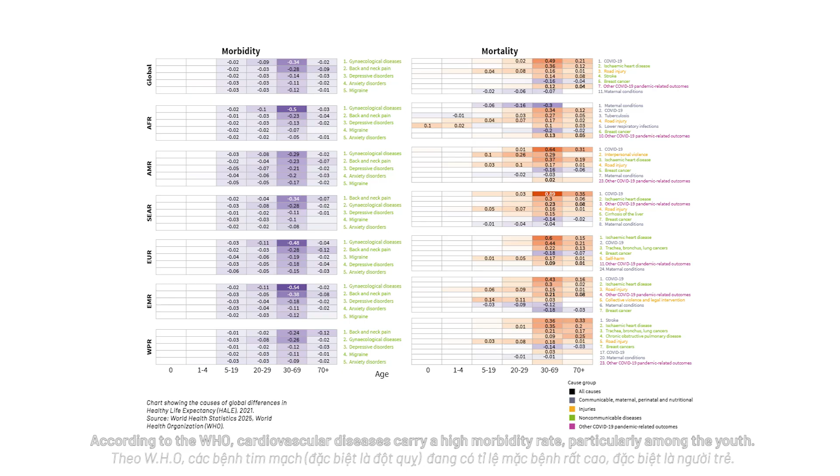According to the WHO, cardiovascular diseases carry a high morbidity rate, particularly among the youth. Vietnam is no exception. Stroke and ischemic heart disease are the leading causes of mortality here, disproportionately affecting young adults. These conditions are entirely treatable with timely intervention.

Yet, in reality, specialized hospitals are heavily concentrated in major cities. This leads to chronic overcrowding at top-tier facilities, while regional patients face critical barriers to rapid diagnosis and emergency care. Therefore, bringing specialized hospital models to local provinces is an urgent necessity.

Take Dong Nai as an example, an industrial hub with millions of young workers. Every morning, we witness crowds traveling to Ho Chi Minh City for medical care, while local provincial hospitals remain overloaded. Moreover, dense truck traffic and rush hour congestion create fatal roadblocks for ambulances.

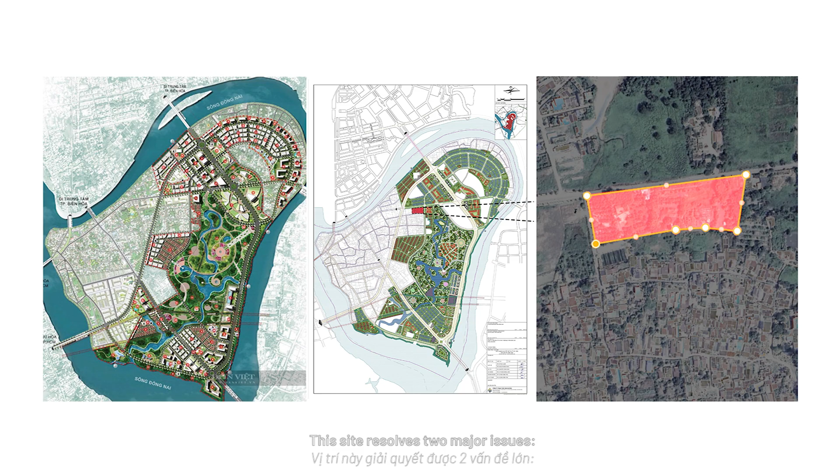To solve this, I designed the 400-bed specialized hospital for cardiology and stroke, located on Hiep Hoa Island. This site resolves two major issues. First, it connects seamlessly to major intersections without industrial traffic or heavy trucks, securing the golden hour for emergency resuscitation.

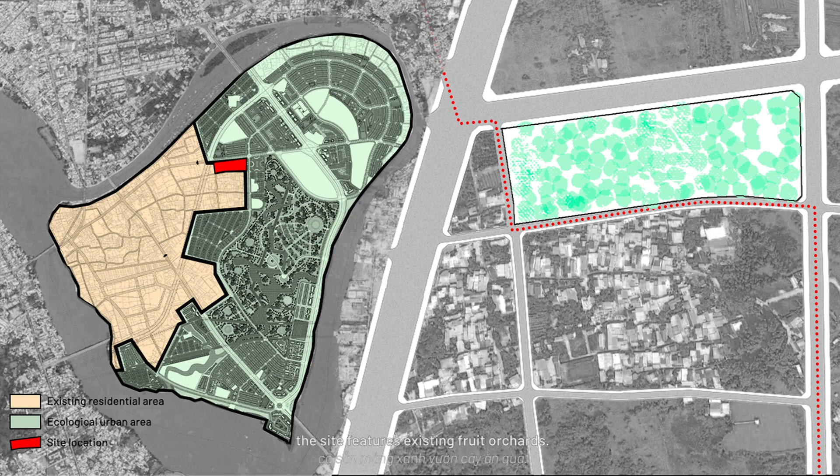Second, nestled between traditional neighborhoods and eco-urban areas, the site features existing fruit orchards. I retained a portion of this greenery as a transition zone, turning familiar community elements into a healing therapy that strips away the cold, clinical atmosphere typical of hospitals.

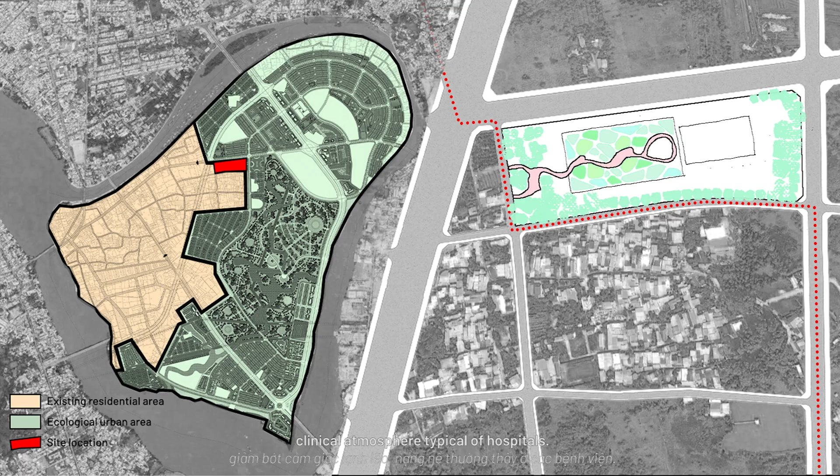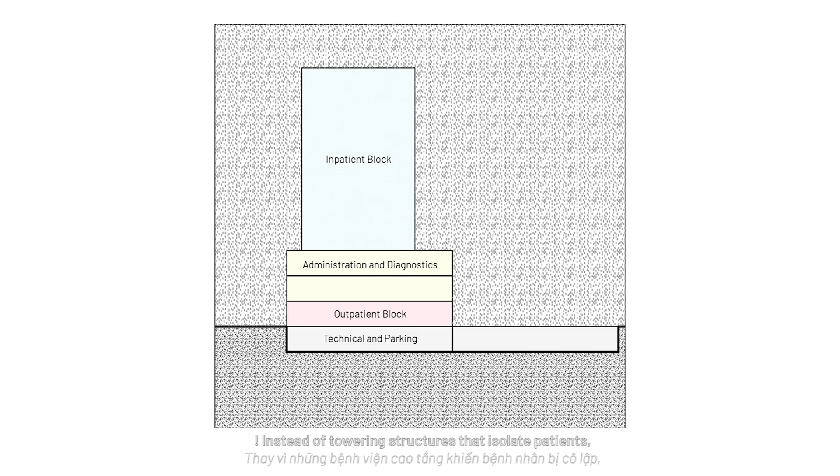Due to zoning regulations, the building has a maximum height of 6 stories. But I view this as an advantage. Instead of towering structures that isolate patients, low-rise architecture aligns the inpatient block with surrounding townhouses, creating familiar, comforting views for the patients.

The outpatient block is gently elevated, giving it a floating sensation like a river island or a ship on water, while liberating the ground floor to form a vibrant public plaza.

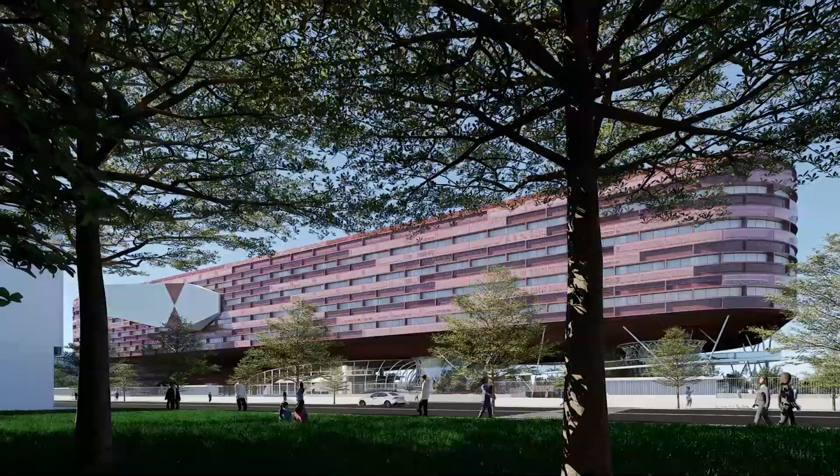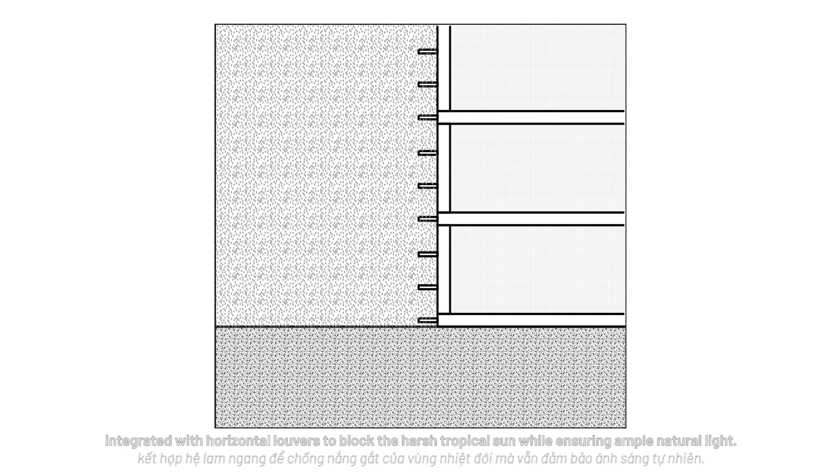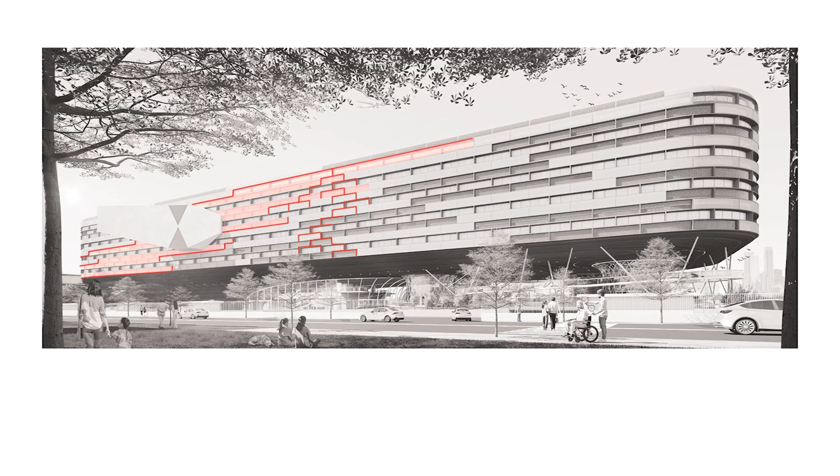On the facade, windows open along the north-south axis, integrated with horizontal louvers to block the harsh tropical sun while ensuring ample natural light. Notably, diagonal lines wrap around the structure, a design language inspired by blood circulation and nerve branching. I selected terracotta and pastel pink tones to soften the architectural mass and evoke a gentle, welcoming feel that feels less institutional.

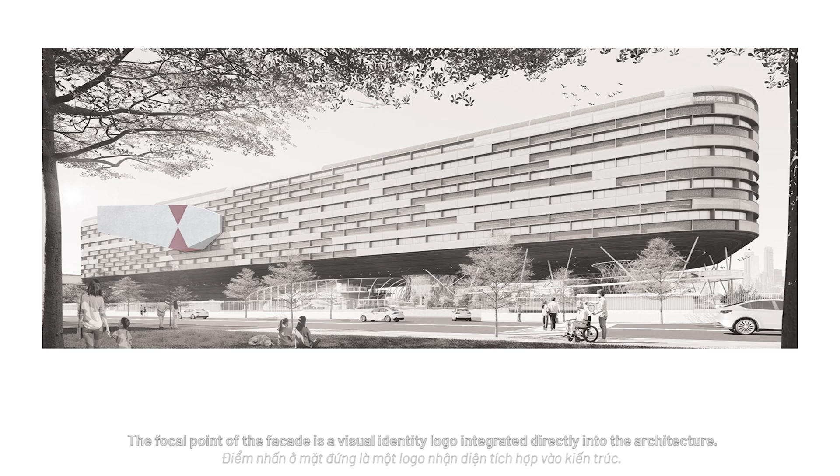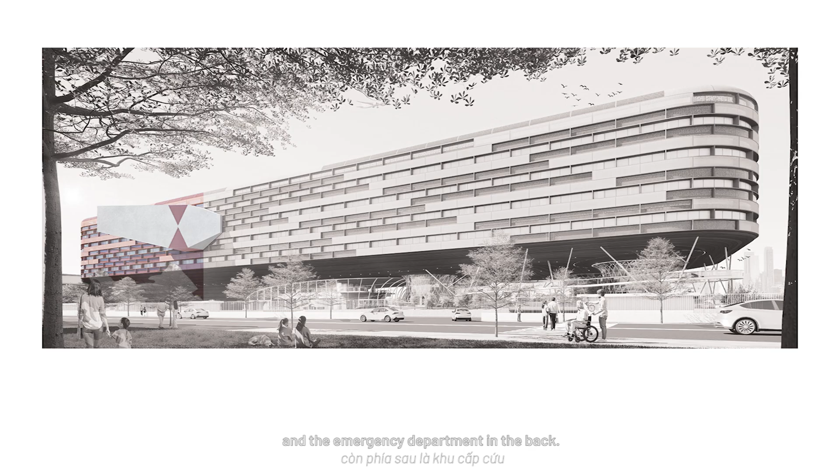The focal point of the facade is a visual identity logo integrated directly into the architecture. By simply looking at this logo, patients instantly recognize the outpatient clinic in the front and the emergency department in the back. This enables intuitive, word-of-mouth wayfinding without relying on complex signage, which is crucial during emergencies. You can pause the video here to take a closer look at the logo design.

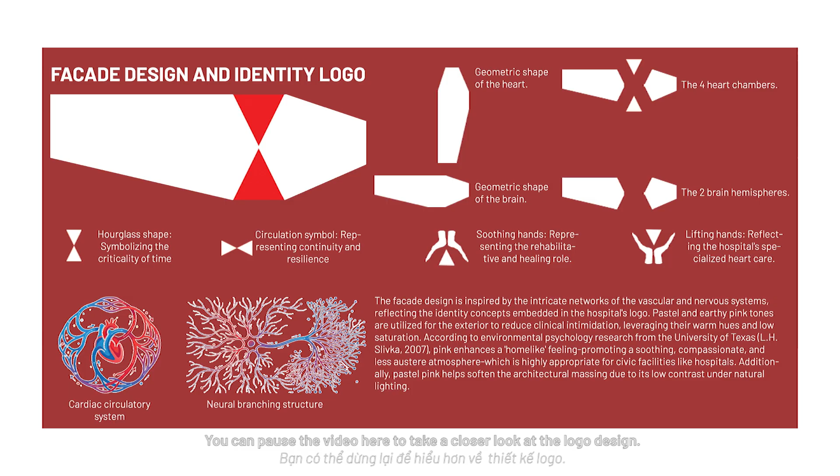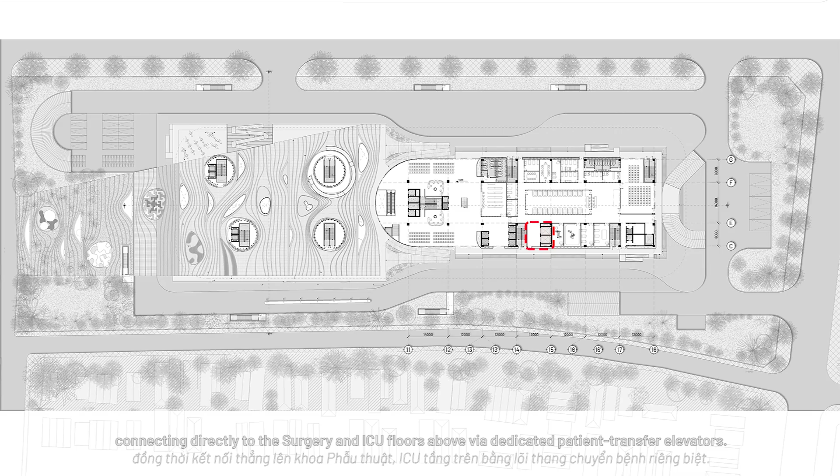Diving into the layout, the ground floor features a clear drop-off leading to the main lobby for scheduled follow-up patients. Ambulances and logistics access the facility independently from the right. The emergency department is equipped with a trauma operating room, lab, and imaging facilities for immediate intervention, connecting directly to the surgery and ICU floors above via dedicated patient transfer elevators.

The spacious front plaza not only serves as a resting and event space, but the floor structure is engineered to convert into a field hospital during crises.

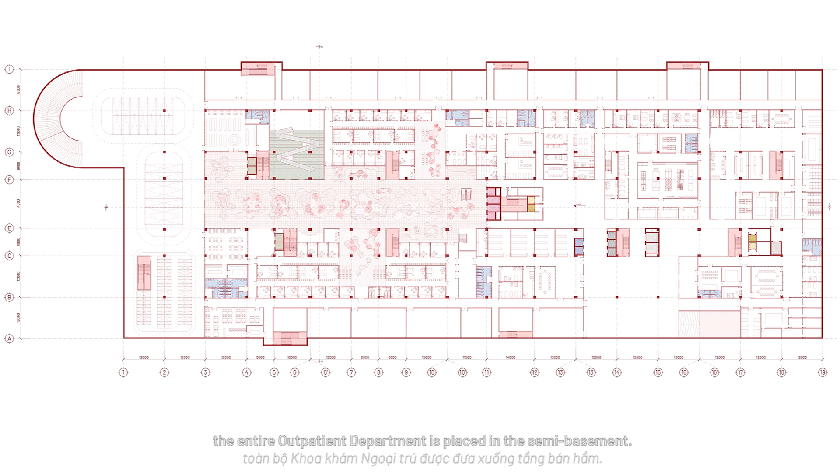To relieve ground floor congestion and maximize landscape area, the entire outpatient department is placed in the semi-basement. Patients can access it directly from public transport or the parking garage, easily stopping by convenience stores to buy visiting gifts. This level utilizes natural ventilation combined with mechanical fans for efficient cooling.

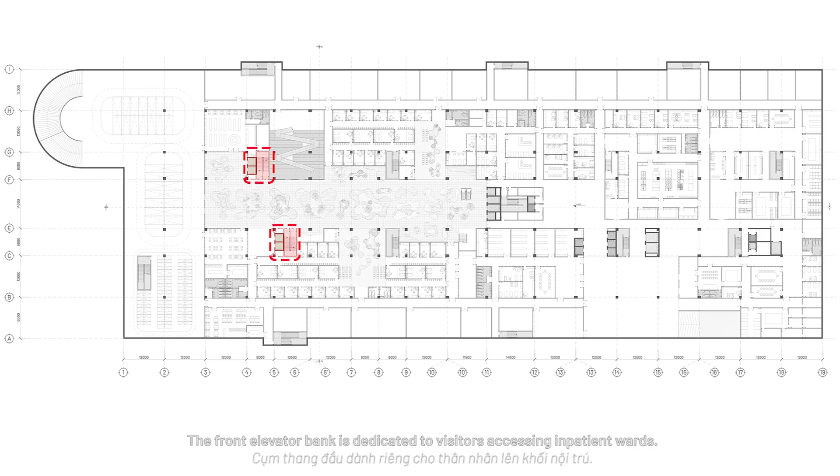Vertical circulation is strictly segregated. The front elevator bank is dedicated to visitors accessing inpatient wards. The central bank serves outpatients and stretchers.

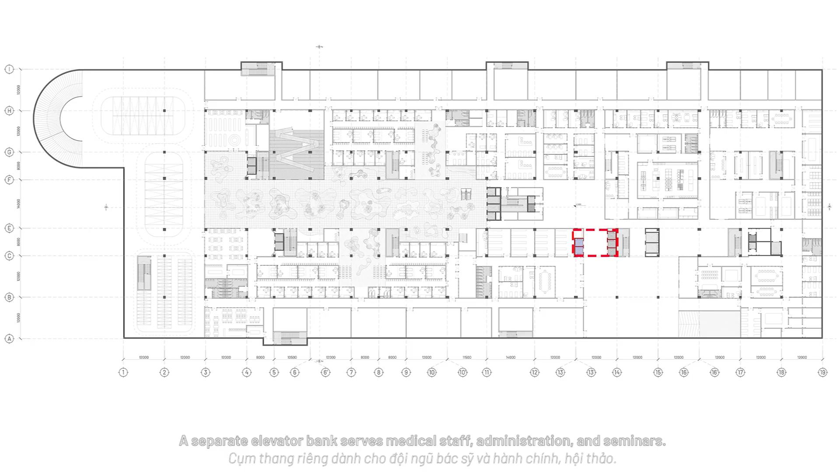The rear houses logistics corridors and elevators, maintaining a strict separation of clean and dirty workflows from nutrition and waste disposal. A mortuary elevator is discreetly placed in the corner for transporting deceased patients to the pathology department with dignity. A separate elevator bank serves medical staff, administration, and seminars.

The intermediate levels are medically optimized. Level 1 houses diagnostic imaging, acting as a transit hub for both inpatients and outpatients. Level 2 concentrates high-traffic technical departments alongside healing gardens for patient relaxation.

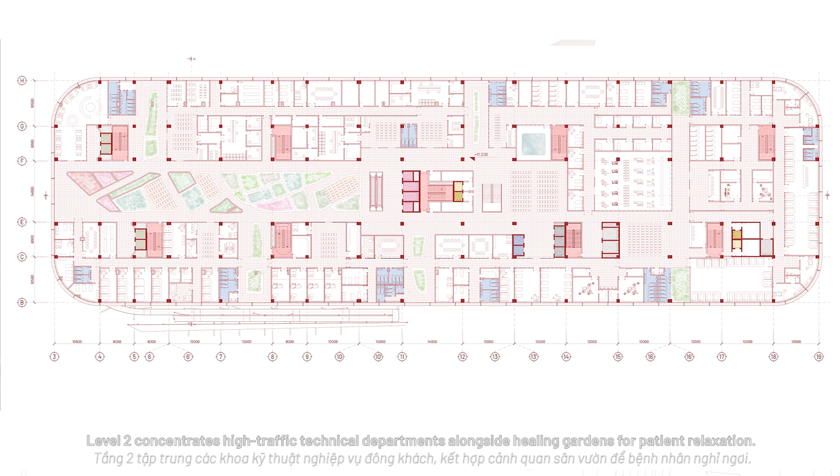Level 3 is the technical heart, housing the surgical suite, which connects directly to the ICU via patient transfer lifts. While these medical functions are ideally placed on a single floor, spatial constraints led me to consult medical experts and study architectural precedents, like the AZ Zeno Hospital, to ensure seamless vertical operation.

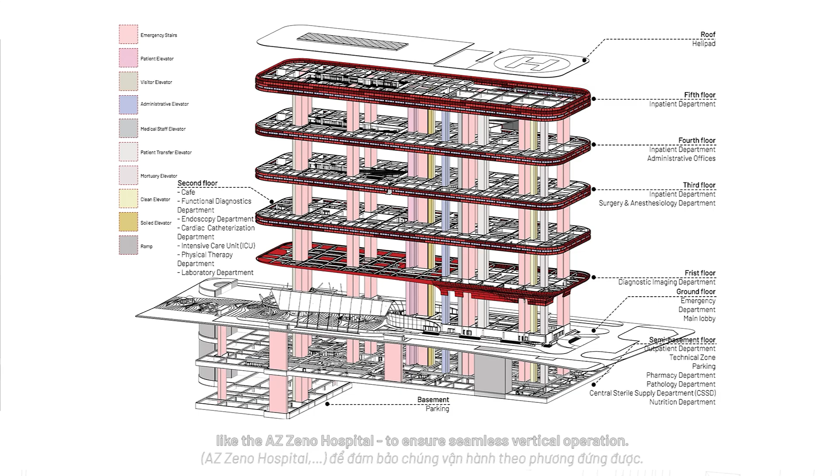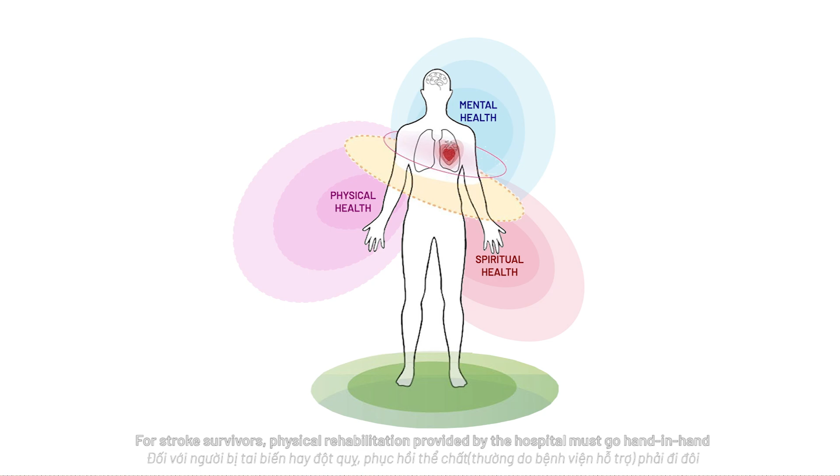The project's biggest differentiator lies in the top 3 floors, the inpatient block for over 300 patients. For stroke survivors, physical rehabilitation provided by the hospital must go hand in hand with mental rehabilitation, which is often guided by family. Therefore, patient rooms are designed like cozy townhouses, with eye-level window sills overlooking the neighborhood outside.

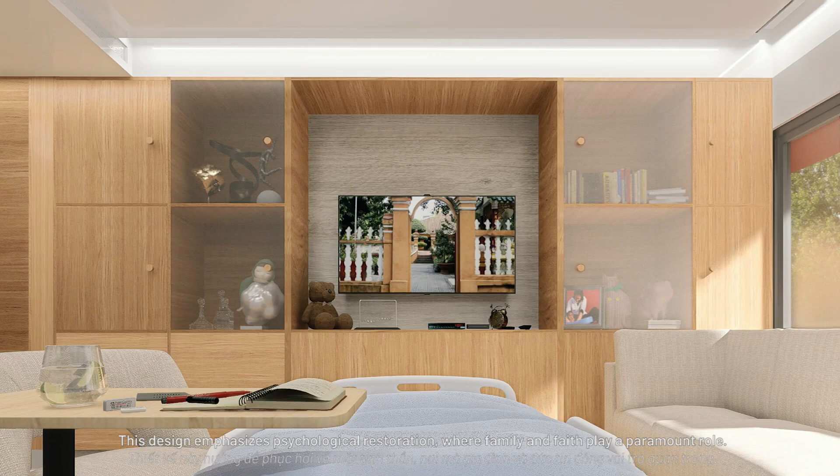Specifically, I designed TV shelves resembling family living rooms, where relatives can display familiar mementos from home, triggering cherished memories and fostering emotional peace. This design emphasizes psychological restoration, where family and faith play a paramount role.

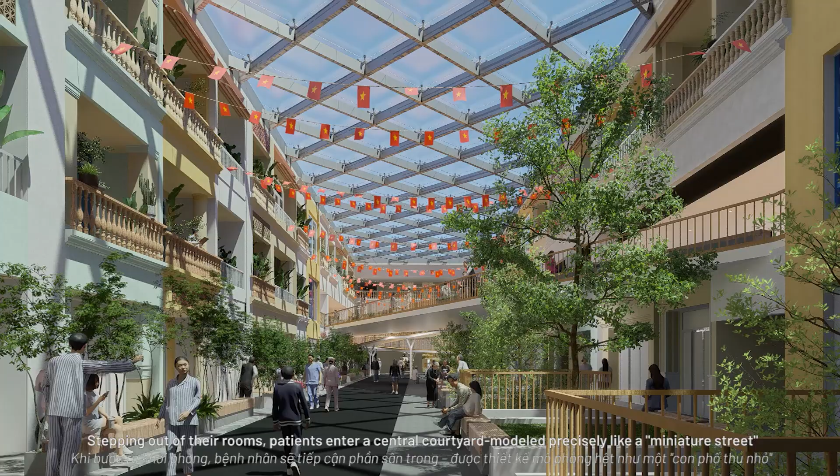Stepping out of their rooms, patients enter a central courtyard modeled precisely like a miniature street with realistic elevations, sidewalks, and facades. This unique environment encourages physical movement and helps patients relearn daily social reflexes, waiting to cross the street, avoiding obstacles, and greeting neighbors.

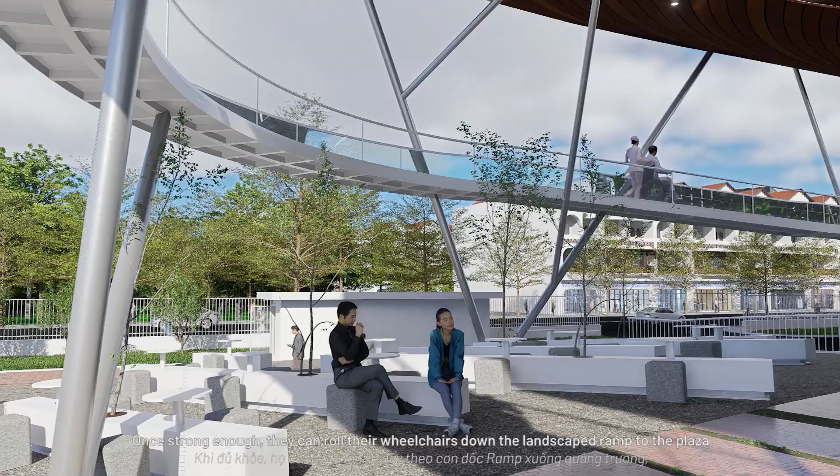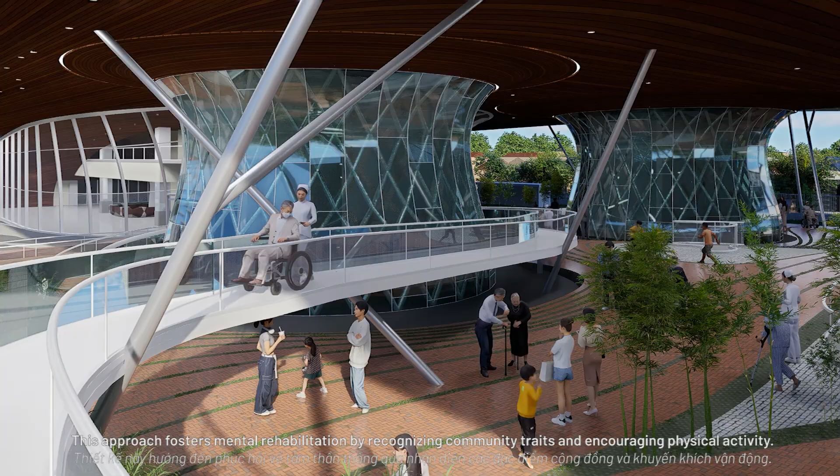Once strong enough, they can roll their wheelchairs down the landscaped ramp to the plaza, watching the vibrant semi-urban, semi-rural life of the island. This approach fosters mental rehabilitation by recognizing community traits and encouraging physical activity.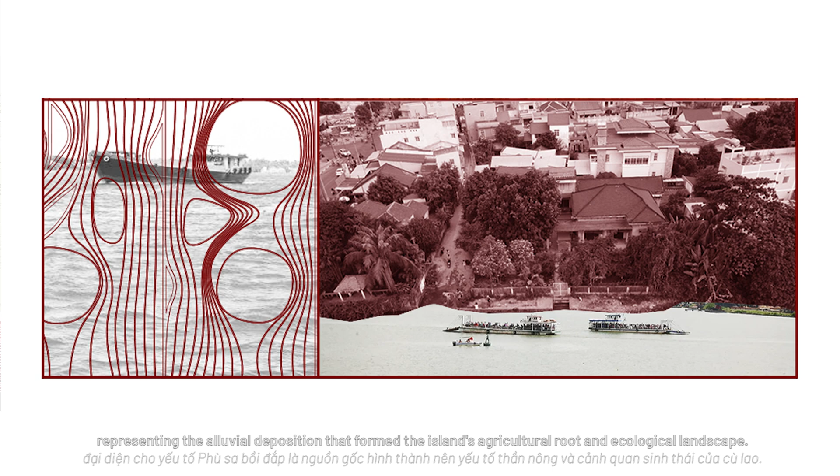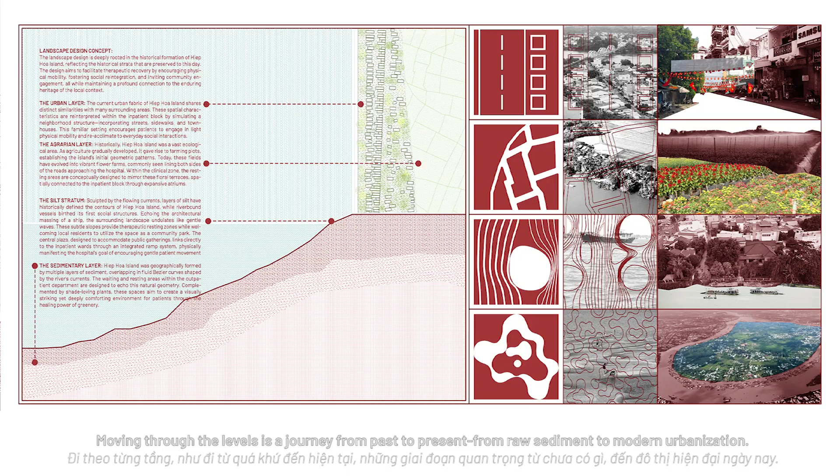Ground plaza: soft, flowing curves echoing the Dong Nai River, representing the alluvial deposition that formed the island's agricultural roots and ecological landscape. Semi-basement: continuous, undulating organic mound symbolizing riverbed sediment, the very origins of the island. Moving through the levels is a journey from past to present, from raw sediment to modern urbanization.

This overall landscape strategy transforms the hospital into a public, community-oriented space rather than an isolated clinical facility, providing a much more comfortable experience for outpatients and creating an optimal healing environment for inpatients.

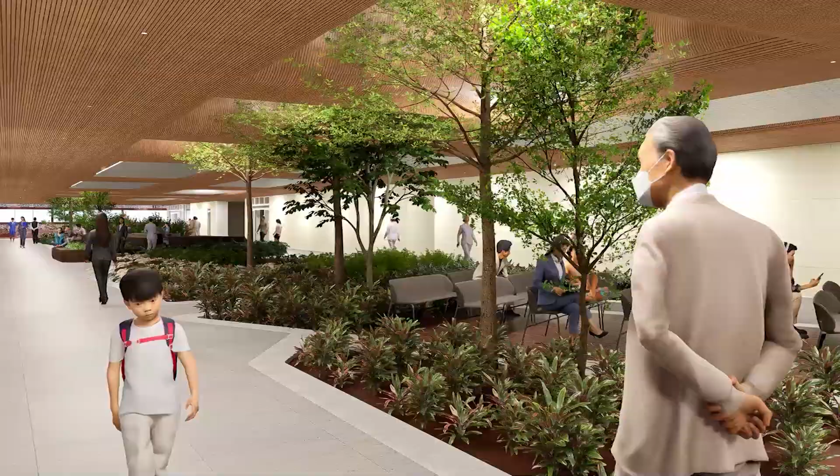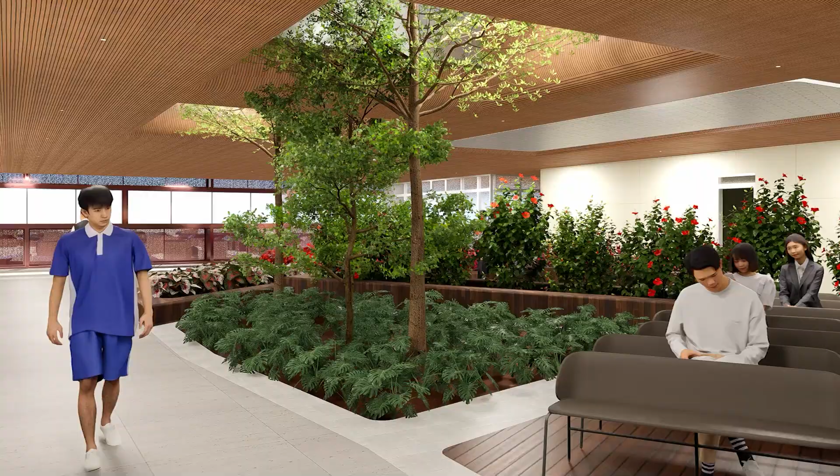I believe Vietnamese doctors possess exceptional skill in saving lives during critical emergencies. However, today, we must upgrade our spatial design to actively support patients throughout their recovery journey. This project is a practical experiment, integrating a complex specialized hospital into a constrained site while guaranteeing precise medical workflows through expert consultation. It tests whether architecture and landscape can actively assist healing despite real-world site limitations.

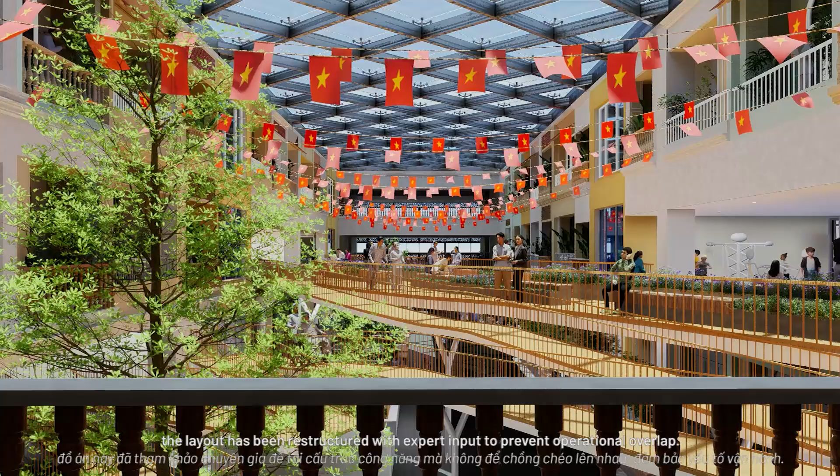While there may be minor imperfections, as I am an architect rather than a medical planner, the layout has been restructured with expert input to prevent operational overlap. By drawing from local culture and integrating community amenities as therapeutic tools, an approach inspired by leading hospitals in Singapore, this project strips away traditional clinical coldness.

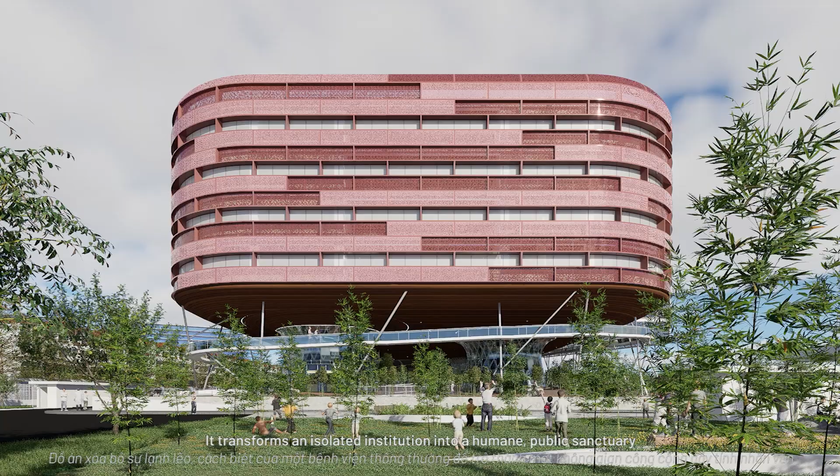It transforms an isolated institution into a humane, public sanctuary where indigenous culture and community connection serve as the ultimate healing prescription for young people facing overwhelming life pressures. Every region and every culture brings its own unique solutions and distinct community values. This contributes to a more diverse healthcare architecture, offering patients a gentler and more hopeful life.